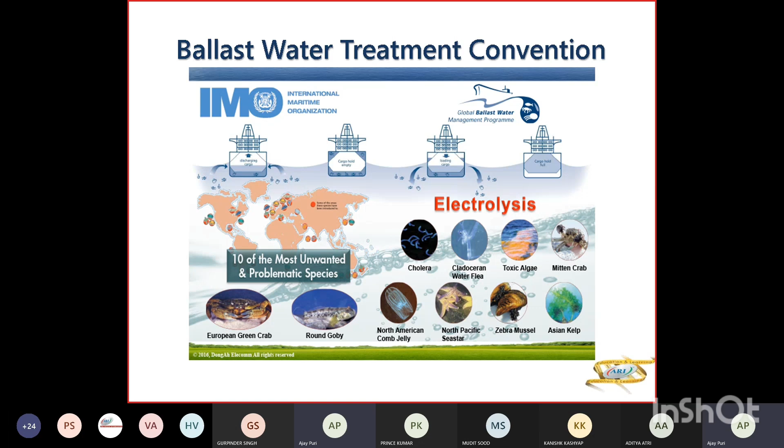Earlier we were doing exchange, but in exchange the problem had come up for the stability of the vessels, and a lot of vessels had cracked up because of ballast water exchange in rough weather. That's why they have phased out ballast water exchange in favor of treatment. So all ships have to have a ballast water treatment plant by 2024.

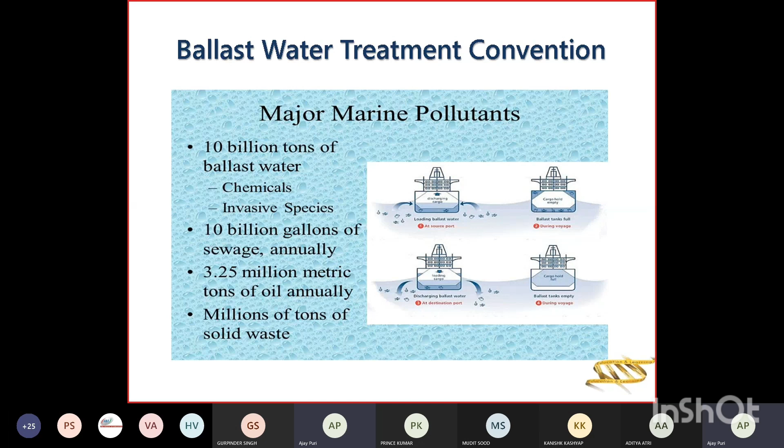Now, 10 billion tons of ballast water with chemicals and invasive species, 10 billion gallons of sewage, and 3.25 million metric tons of oil are discharged annually, and so many millions more. So the water of the sea is getting polluted all the time. We have control of sewage by Annex 4, control of oil by Annex 1, chemicals by Annex 2. So what about the ballast? That's why the ballast water treatment convention came up.

So why do you require ballast water? You require it for trim and stability because when you're discharging cargo you become pretty light, so for better stability you have to take ballast. And if your trim is too high, maybe 5 meters, then you have to take ballast. So your ballast will have water, stones, sediments and living organisms coming through the suction pipe.

About 12 billion tons of ballast water is transported annually. Ships carry about 1 lakh to 100 lakh gallons of ballast water. With this ballast water being carried, about 7,000 plus marine species are transported daily from one place to another. And every 9 weeks, a new species is introduced in the world.

Now, the Great Lakes are 5 lakes in Canada and the US, made of fresh water. You enter the Great Lakes through Montreal by various locks, about 12 to 13 locks are there. The ships which normally go there are known as lakers. About 160 plus non-native species have entered the Great Lakes and they are destroying the ecosystem there. 5 billion dollars is the estimated economic impact of zebra mussels over the next decade. So you can understand what is the worldwide outcome of these ballast water organisms.

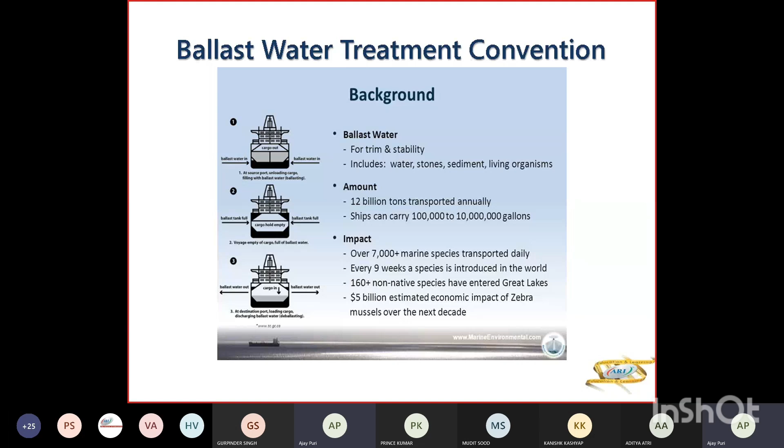So you had the D1 convention. The D1 standards were to exchange the ballast water in the open seas away from coastal areas. 95% of the organisms were changed. But what about the 5%? So the D2 convention came up.

So there's the D1 standard of exchange. The D2 standards have to be complied with by 8 September 2024, by all ships. The D2 standards specify the maximum amount of viable organisms that can be discharged - viable meaning living, which you can only see under a microscope. Beyond that limit, you have to do the treatment. Within the treatment, the number of cholera bacteria, enterococci bacteria - those standards are given there.

So all new ships must conform to the D2 standard. And until the date they have to meet the D2 standards, existing ships should exchange ballast water in mid-ocean as per the D1 standard, until the D2 standards have been obtained. Over time, all ships will have to meet the D2 standard by 2024. Your renewal survey is your IOPP survey - International Oil Pollution Prevention Certificate. Whenever that's due, that's when compliance will be checked. So all ships must have a ballast water management plan as per the ballast water convention.

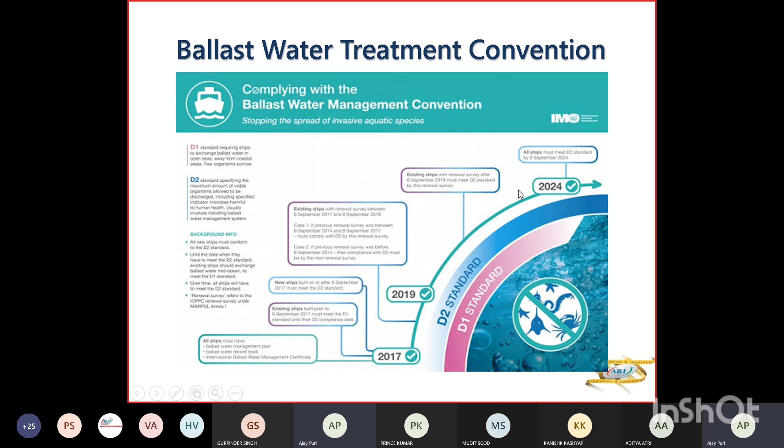Now, in order to reduce your damage from invasive species, what is invasive species? That means they enter that area, destroy the ecosystem there, destroy the fishes there, and invade in the territory.

You know the saying that every dog in the street is like a tiger. So any other dog tries to go in that territory, and the dog in this area is going to bark him away.

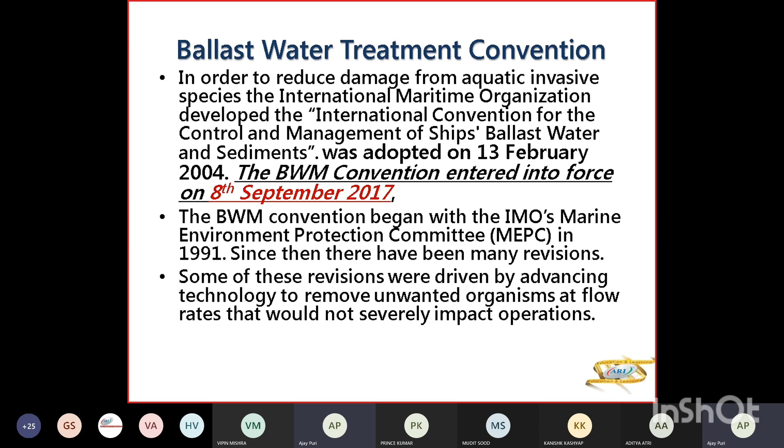So IMO approved Marine Environment Protection Committee, जो MEPC है, approved a resolution containing a revised implementation scheme so that they comply with the D2 biological standards.

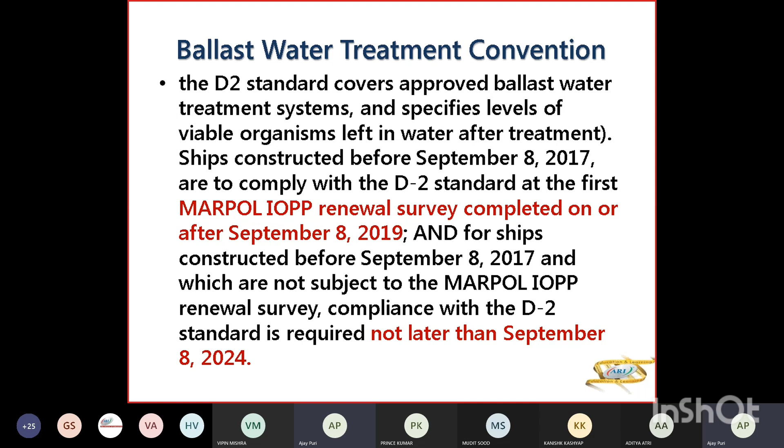So new ships must comply with a D2 standard. New ship means built on or after 8 September 2017. And they have to conduct ballast water management that meets the D2 standard from the date the ship is put into service.

So the existing ships constructed before 8 September 2017, which have your IOPP certificate for 8 September 2019 and after, उसके बाद इनका D2 स्टैंडर्ड होगा।

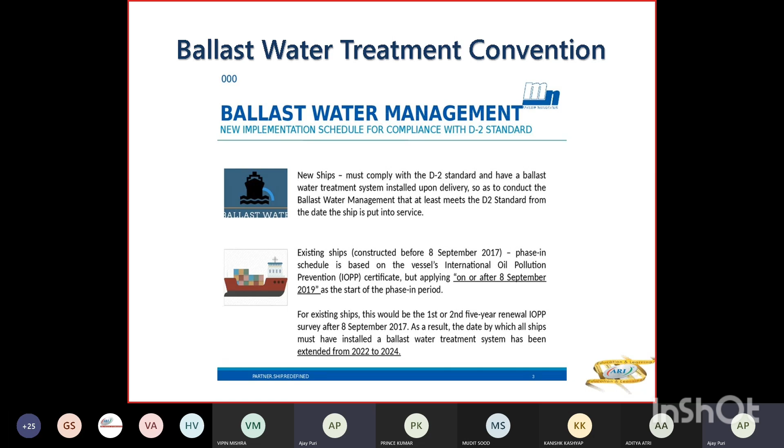So for existing ships, this would be first or second 5-year renewal survey after 8 September 2017, and the date for all ships has been extended to 2024. तो मतलब finally all ships have to have by 8 September 2024 the ballast water treatment. That is D2 standard.

So D1 standard तो आपको पता ही है। D2 standard specifies the amount of viable organisms discharged, including the specified indicator microbes harmful to human health. These are usually met by installing a ballast water management system.

तो ये 7,000 species आपकी daily आती हैं every hour into ballast water, and this is affecting 2.4 billion people, and one new species is introduced every 9 weeks into an area, and 80% of world trade is carried by ships.

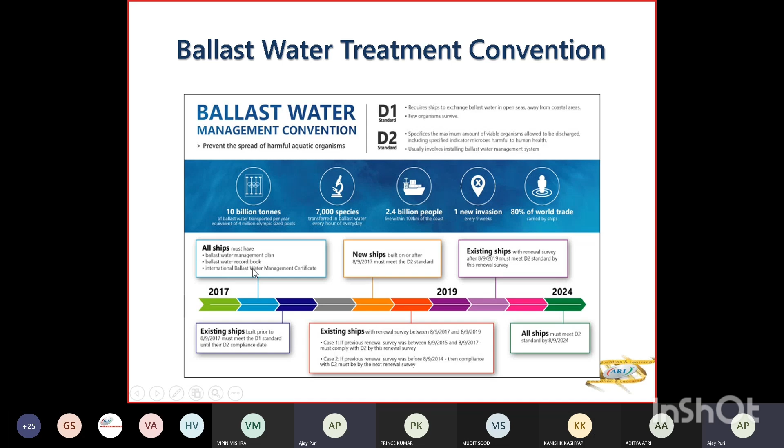So ये बताया कि all ships must meet D2 standard by 8 September 2024, and all ships as per ballast water convention must have ballast water management plan, ballast water record book, and international ballast water management certificate.

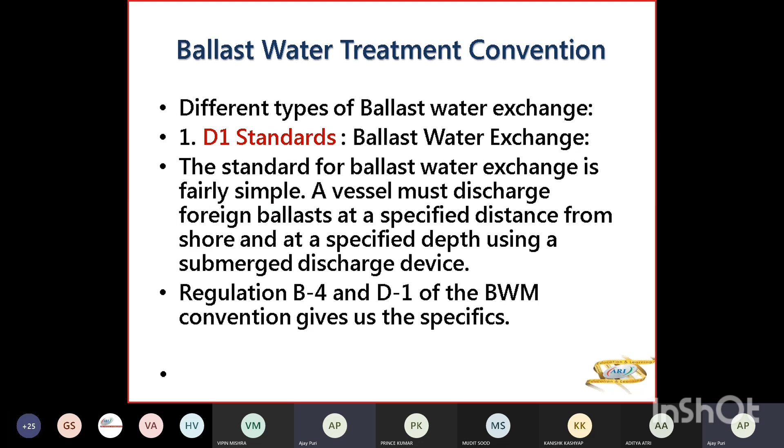So आपका D1 standard क्या है? D1 standard is basically ballast water exchange. So you have to discharge ballast at a specified distance from shore at a specified depth, and your exchange should be either done in mid ocean or at least 200 nautical miles from shore. And at this location, the depth of water should be 200 meters or more.

Now, when your exchange is there, it should be at least 95% of the volume, and it should be repeated 3 times. And the vessels must demonstrate high efficiency exchange to reduce number of exchange cycles.

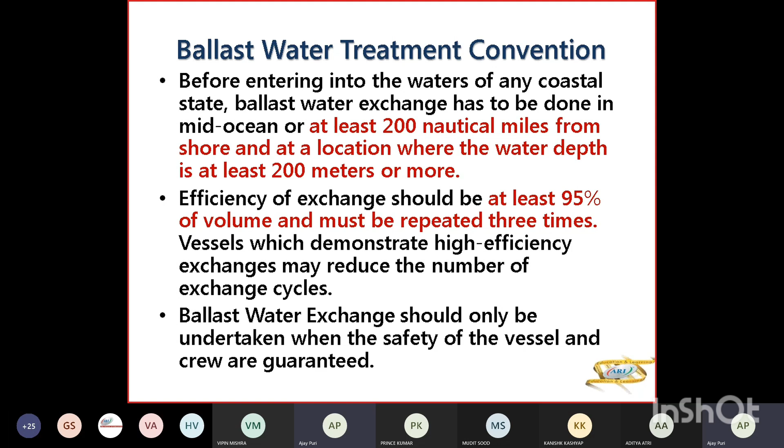Ballast water exchange to be taken only when your weather is good, because you can't do it in rough weather, otherwise the safety of the crew will be lost. You can't keep the crew in danger if you are doing ballast water exchange.

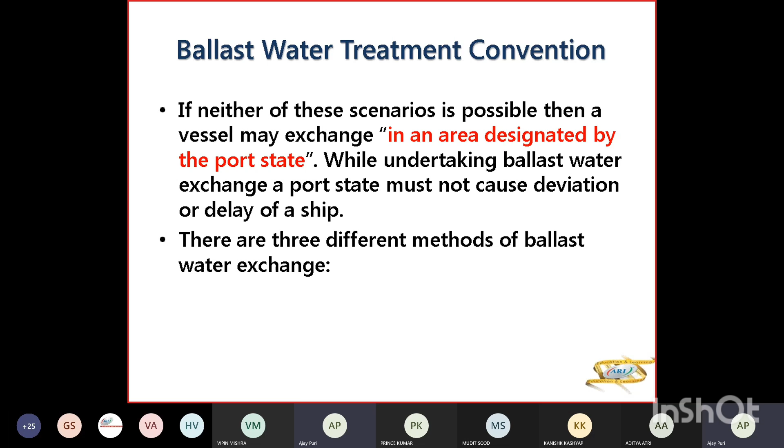But suppose this scenario of 200 nautical miles, 200-meter depth is not possible. Then you can ask the port state to advise which area they designate for exchange. And when you're having this kind of exchange, port state should not deviate or delay the ship. They should not say you go 500 nautical miles here and then discharge. They should not delay and cause a deviation for the ship.

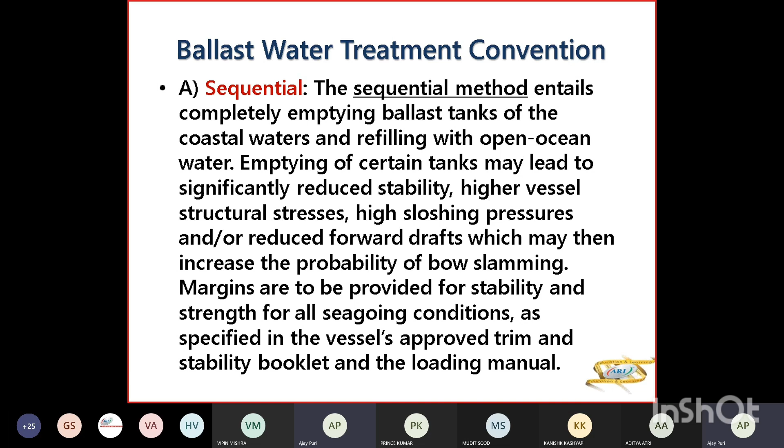So sequential is discharging and refilling your tanks. Flow through method is filling and overflow. That is, you are filling the tank from below and overflowing the tank from top. Dilution method is you're pumping out water from down and putting water in the tank from top with hoses. So one is your sequential method where you're completely discharging and then completely filling your tanks, which is the most dangerous one. Most precautions to be kept there.

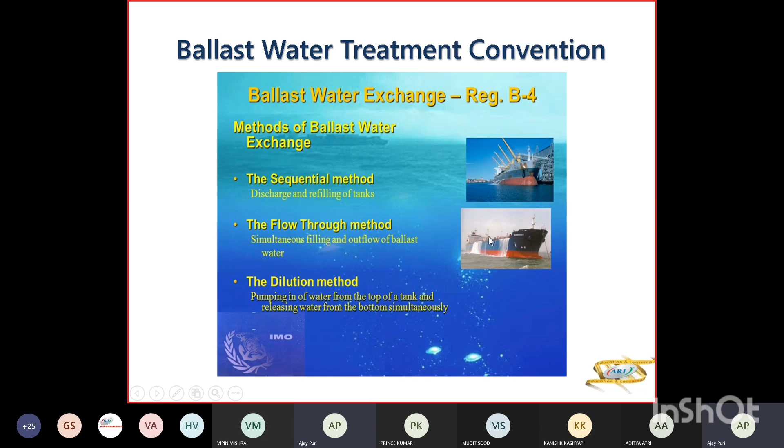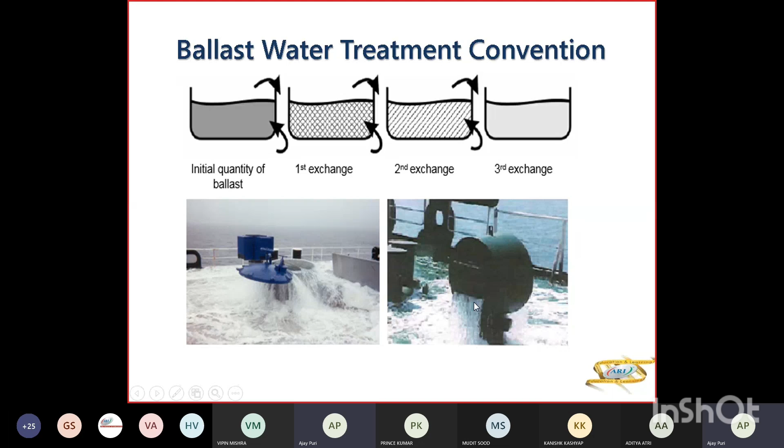Flow through method is the one you see in the photograph here. You're filling up your ballast tank, you're taking suction from down and overflowing your tanks 3 times the volume of your tank. Dilution method is not overflowing. You're taking the water in the tanks from top and pumping out from below at the same rate. So this is your overflow method which you normally do on your ships, or flow through method.

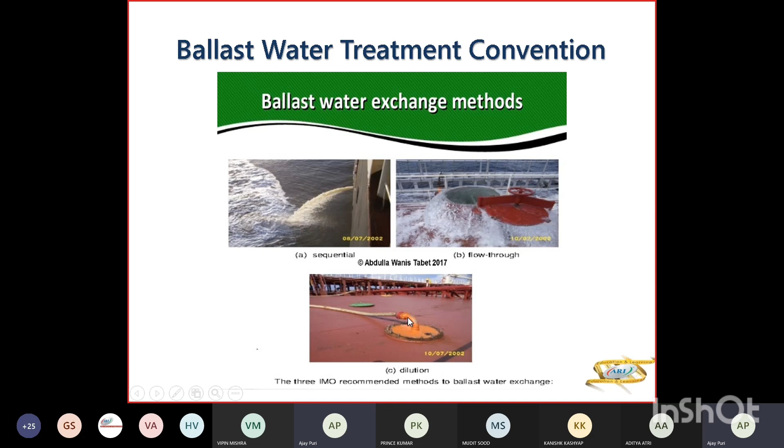This is the flow through method. So this is your sequential method. You are pumping out and then pumping in. Flow through method is opening all your tank domes and overflowing from that. Dilution method is taking the water from top, pumping out from below. So you make those adjustments how to take the water from top. The rate of taking in water and pumping out should be same.

Now, what are your disadvantages in this ballast water exchange? The operation is very laborious, a lot of people involved, and you see here you're overflowing in very heavy seas, and it can break up your ship because the fatigue limit will be crossed and the ship can sink. So your safety limits have to be taken into consideration. So sequential method may endanger the strength of the structure and needs favorable sea and swell conditions. Otherwise, we should not do it.

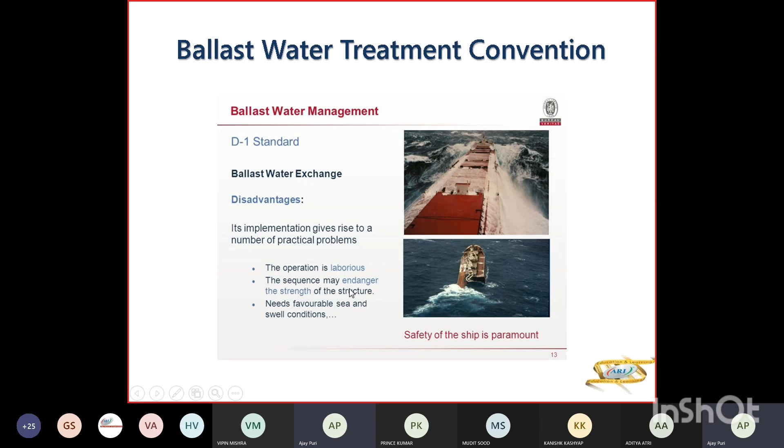Now, आपके एग्जाम में कई बार आ गया है, what are the ballast water exchange precautions to be taken? Because you can't just start your ballast water exchange without seeing all those things. First is avoidance of over pressurizing or under pressurizing your tank. Whenever you over pressurize the tank, that means you're overflowing it. The water head on the tank is creating a lot of pressure on the tank. So long-term effects on the strength will be known afterwards. The cracks will appear there.

Number two is your free surface effects will have effect on stability and sloshing loads on your tanks which are slack at any time. And whatever your admissible weather conditions, are you going to have a storm like we had, extremely severe tropical storm, which hit Gujarat yesterday? In these kind of conditions, you can't think about it because then you are going to lose your vessel and you will not be there.

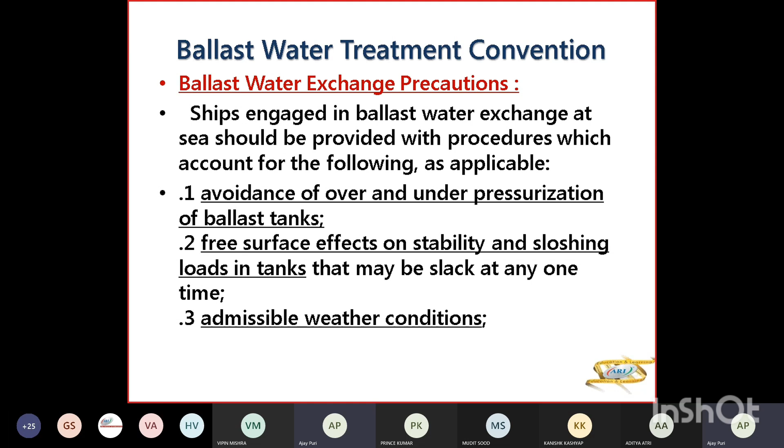Number four, you have to do weather routing in the areas affected by cyclones, typhoons, hurricanes, and heavy icing conditions, because here you can't have your ballast water exchange. Number five, you have to maintain adequate intact stability as per approved trim and stability booklet.

Number six, your bending moment and your shear limit should not be exceeded, or you should not have the stresses going beyond your limits. You have not to stretch your limits. So suppose there is a limit for your bending moment and shearing stress, you cannot exceed it. You have to be within the stress limits. So for that, if it is exceeding, then you have to stop.

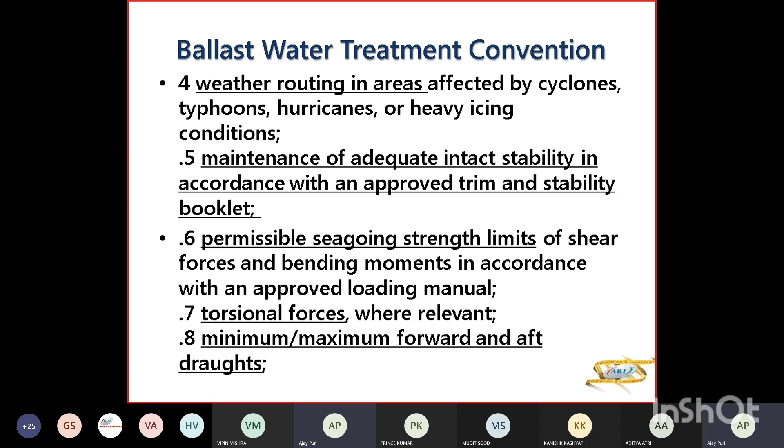For container ships, you have to see the torsional forces also because they can break away your containers also. Then eighth is your maximum and minimum forward and aft drafts. For your stability, you have to maintain them. You can't exceed those limits.

Number nine, whenever there is a heavy wave, you will have a huge vibration on the hull, which we have done in vibration stress. So there you have to see your wave-induced hull vibration does not exceed the limits to cause resonance.

Number 10, precautions is you have to maintain the records of ballasting and deballasting. So how much time, when you're starting, when you're stopping, how many times you're doing, 3 times and all. That you have to monitor. The records have to be maintained.

11, contingency procedure for situations which may affect the ballast water exchange at sea. Like if you have a very bad weather, or maybe you have a pump failure, and you started and now you have a pump failure, now what you'll do? Or suppose you've started off halfway through sequential, now you have loss of power and the generator is conked off. Now what to do? Because the ballast is half or maybe less than half, or you're completely empty, now you can't fill in only. So what kind of contingency procedures or plan you'll have for that, so that you can counter it?

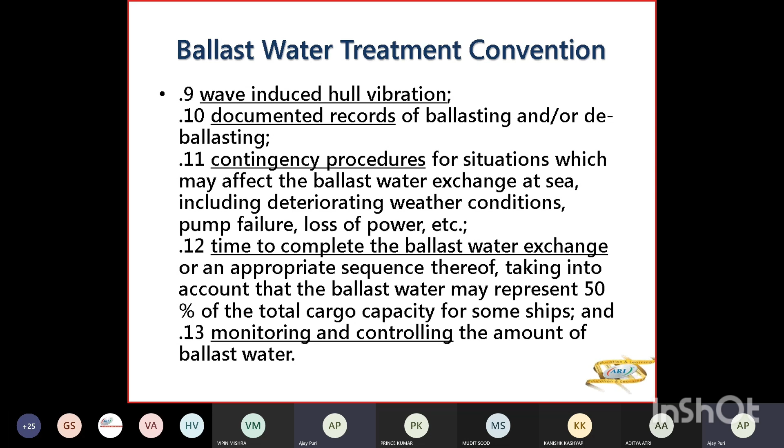Number 12 is the time for completing a ballast water exchange. So you have to see how much time it will take for completing your exchange. And number 13 will be monitoring and control of the amount of ballast water, because overflow and flow through you have to do 3 times, dilution you have to do 3 times, so that you have to monitor. Sequential you'll be doing only once, not 3 times, but overflow, that is flow through, and dilution, you have to do 3 times. So the first method we have already done, and these were the precautions for the first method.

Now the flow through method involves pumping replacement ballast water into the bottom of the full ballast tank, forcing existing ballast water through the overflow or any other arrangement of flowing out. Now, in the trial, they have seen that overflowing once will not help out, because the organisms will be sticking to the underside of your deck. So they said, okay, by pumping out at least 3 times the volume of your tank, you will achieve 95% effectiveness in eliminating aquatic organisms. So 5% might remain, 95% will come out if you do 3 times. But in flow through, your stability will not be affected because you have the same amount of ballast water.

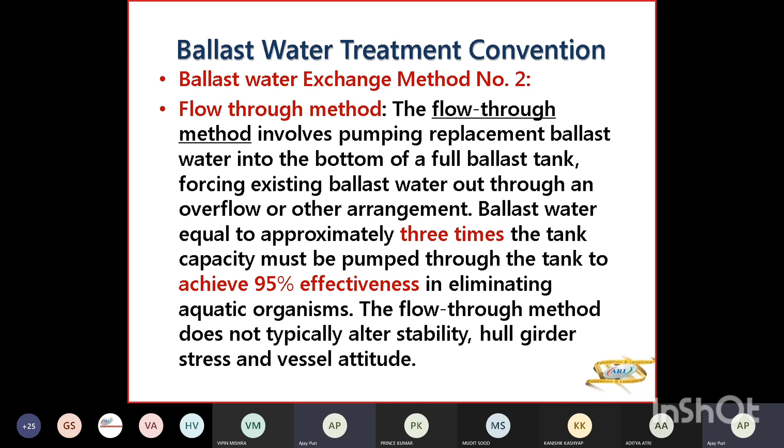So what are the precautions to be taken for number 2, that is the flow through? In this, there will be pressurizing in your tank. Your air pipes are not designed for continuous ballast water overflow, because they are only for releasing air, not for water. So if you are continuing ballast water exchange for so many years, it might put a lot of pressure on the tank. Structural damage might occur in the long run.

Number 2, current research indicates that pumping at least 3 full volumes of tank capacity would be needed to be effective when filling clean water from the bottom and overflowing from the top. That is, filling clean water from the bottom and overflowing from the top, you will require 3 full exchanges for having 95% effectiveness of removing aquatic organisms from your ballast water.

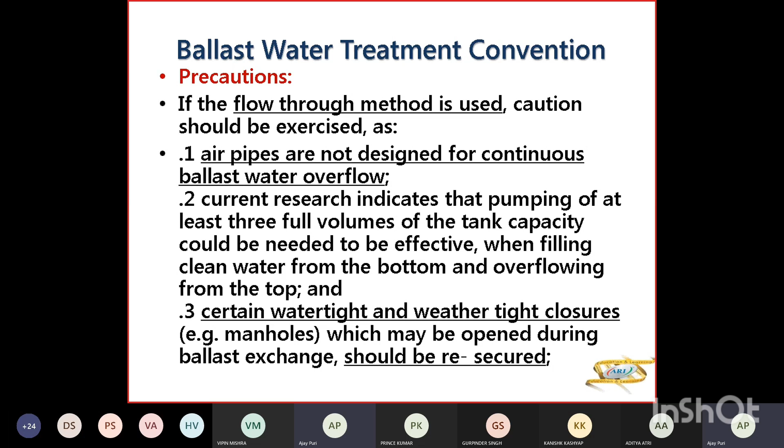Number 3, when you're opening your watertight and weathertight closures, which are the manholes, for ballast water exchange, you have to close every one, all the manholes, otherwise you'll have a problem. So you have to remember that you have to close all your manholes. Then another thing is, when you're doing ballast water exchange, you'll have a lot of water on deck and somebody might slip. So your safety wires are to be rigged so that nobody falls on deck. Then you can have a problem of somebody falling inside an open manhole, because there are a lot of open manholes on deck. So those safety precautions are to be taken.

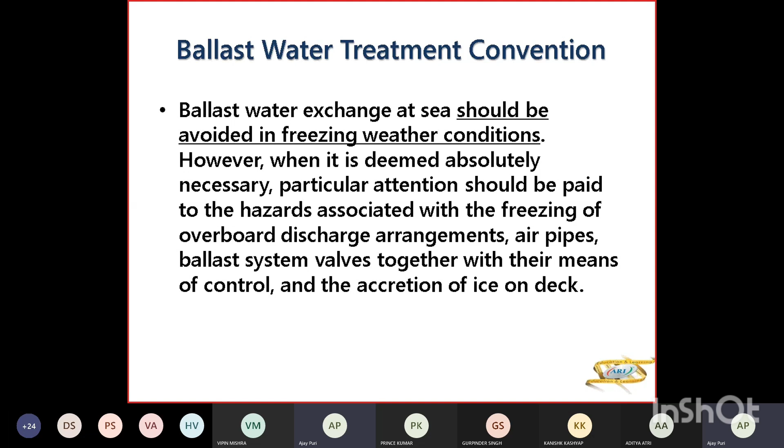And if you're doing ballast water exchange in the night, it might disturb your navigation also. Then in freezing conditions, you should not do ballast water exchange unless absolutely necessary, because your air pipes might crack, and you will have a lot of ice on deck because you're doing overflow, and that ice is going to increase your stability issues because of the weight of ice accumulated on deck, so the stability might get affected.

Plus you have to fit your loading instrument to perform calculations of shear force and bending moments induced by ballast water exchange at sea, and bring them below your permissible strength limits. You can't exceed your fatigue limit at any time, because that will crack your vessel.

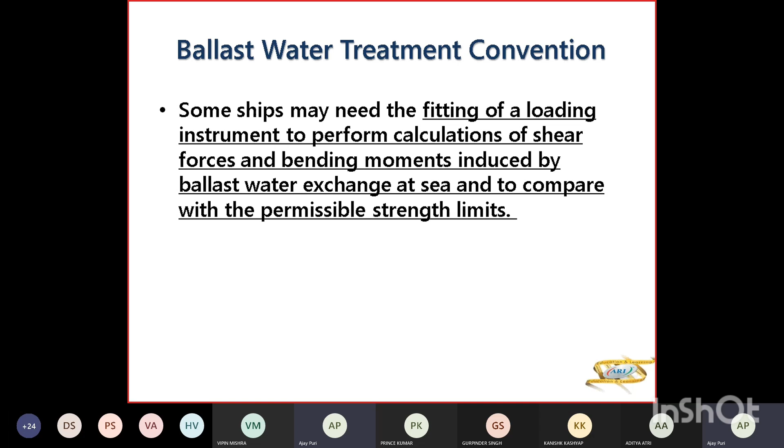Now we do number 3, that is the dilution method. In the dilution method, you are taking the ballast water from top, pumping out from below. This you have to do 3 times, 3 times of your tank volume, to achieve 95% effectiveness, and you have to see that the pumping-in rate inside the tank is the same as the pumping-out rate, because you have to maintain a constant level in the tank. So you are filling from top, simultaneously discharging from bottom, maintaining constant level.

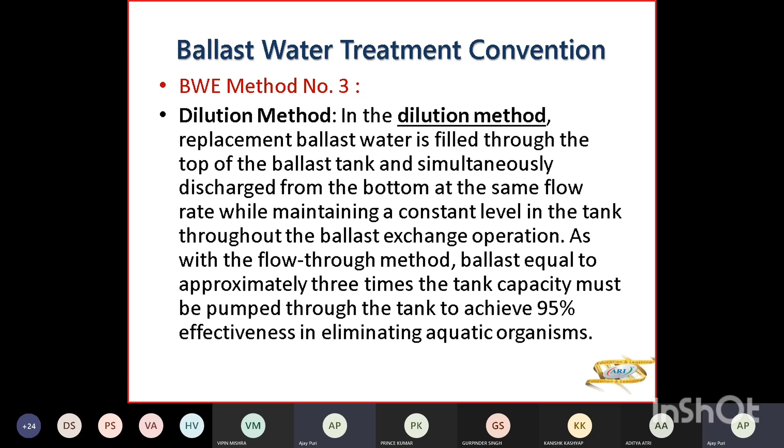And ballast equal to 3 times the tank capacity must be pumped through the tank to achieve 95% effectiveness in eliminating aquatic organisms. Now the dilution method has better advantages than the flow through method because you are not overflowing and putting pressure on your tank. So you're maintaining stability and strength, but the problem is you are using 2 pumps, not 1. In overflow, you are using only 1 pump, pumping in and overflowing. But here you are using 2 pumps.

One is pumping in from the ballast pumps or fire pumps or other pumps or tank cleaning pumps, and pumping out from ballast pumps. So 2 pumps are being used. Fuel utilization will be more, wear and tear of the pumps will be more. But the advantage is nobody is slipping on deck, your manholes are not open, and at the bottom of your tanks, the sediments will be totally removed.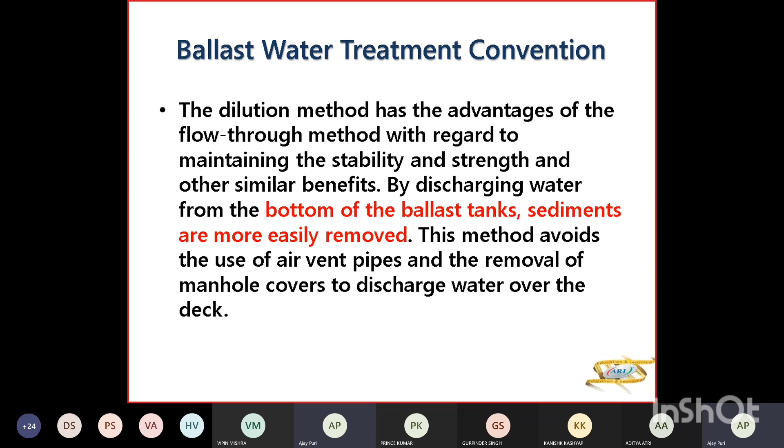All your ballast tanks will be absolutely clear with this because the sediments in the ballast tanks are totally washed off in this method. So it avoids the use of air vent pipes and removal of manhole covers to discharge water over the deck.